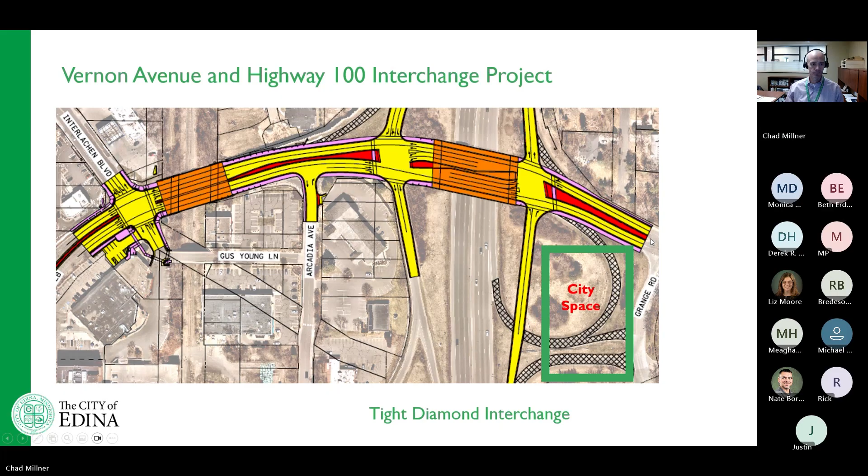We have been communicating in many methods, so thank you for receiving those and participating. Again, the best area to get future updates is bettertogetheredina.org/Vernon Highway 100. This is the last bi-weekly virtual meeting that we'll have this year, and then we'll think about next year going forward.

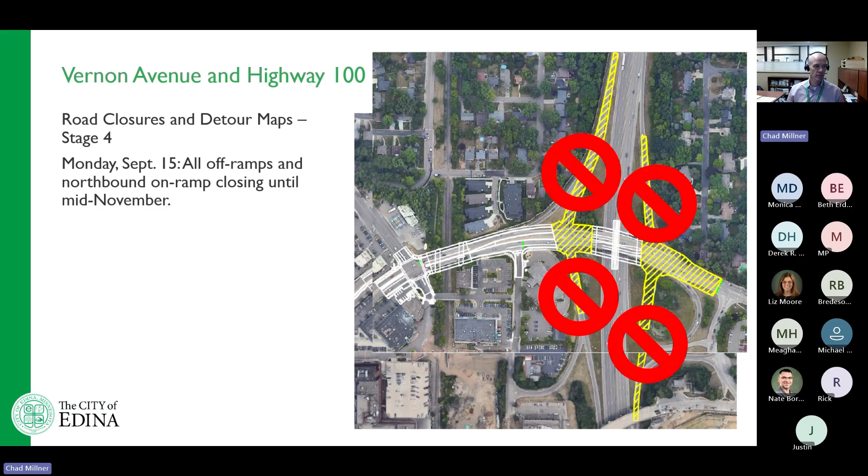What did we tell you in September, early September? We said that on stage 4, we're going to close all the off ramps, on and off ramps to Highway 100, and that we were going to close those until mid-November. We are indeed going to reopen those Saturday morning, Friday night into Saturday morning this week. So we met that promise, or at least a big portion of the project with the Highway 100 bridge and the on and off ramp.

And then what we told you two weeks ago was that there was an opportunity that this northbound on-ramp to 100 was not going to be open. It will also be opened. There is work that needs to be done with the noise wall planking. The contractor can do some of that work under traffic. There's a portion towards the end of that ramp where it gets very narrow, and they are coming up with options on how to do that work and also detail if there's going to be traffic impacts at that time.

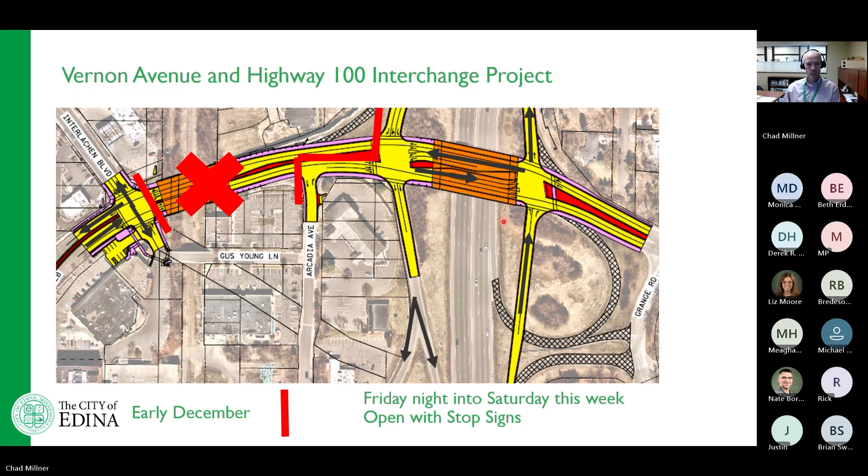Vernon Avenue Bridge, we've talked about the delays there, but work has started on that west abutment. Ames will continue to work as weather allows. Operations will stop until spring, pending weather. I already mentioned Gus Young will reopen with a temporary signal, that's the plan at this point. The new bridge is estimated to be complete in midsummer, and the cost impacts are still unknown.

After that gets enough strength, they can start backfilling up to a point where they build retaining walls on each side and the foundations for those retaining walls. We'd really like, if weather allows, to get the foundations for the retaining walls in and a portion of this backfilled before a big freeze up.

So then they could place the beams across this winter at some point. Once the beams are across, they could really start operations without load restrictions next spring to form up the forms to pour the deck. So there's a great opportunity if they can get that far with weather, it would really expedite the operations next spring, and they won't be impacted by load restrictions, or less impacted.

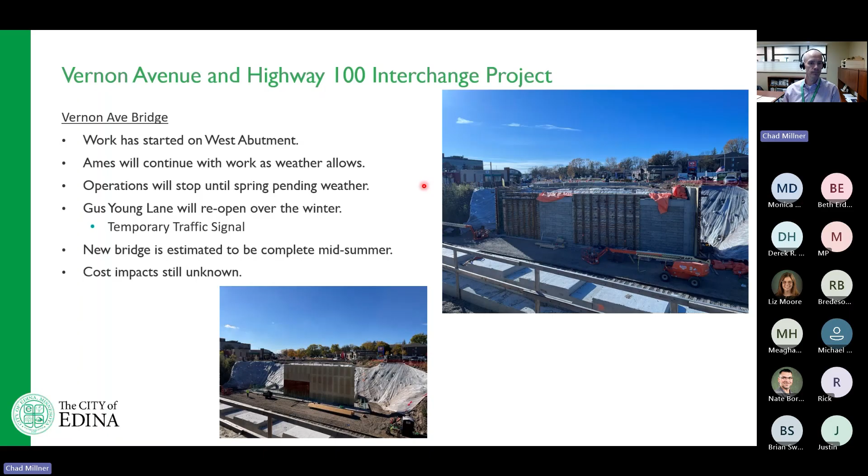What else is going on? The noise wall planks at multiple locations, still an unknown schedule. Those will start going up along Vernon and that northbound on-ramp at some point. Still don't know, the materials haven't showed up.

Ames will do site cleanup as they're doing now, especially where the road's going to reopen on Saturday. They're going to continue to work, trying to build enough to place those beams either now or over the winter to avoid those load restrictions in the spring.

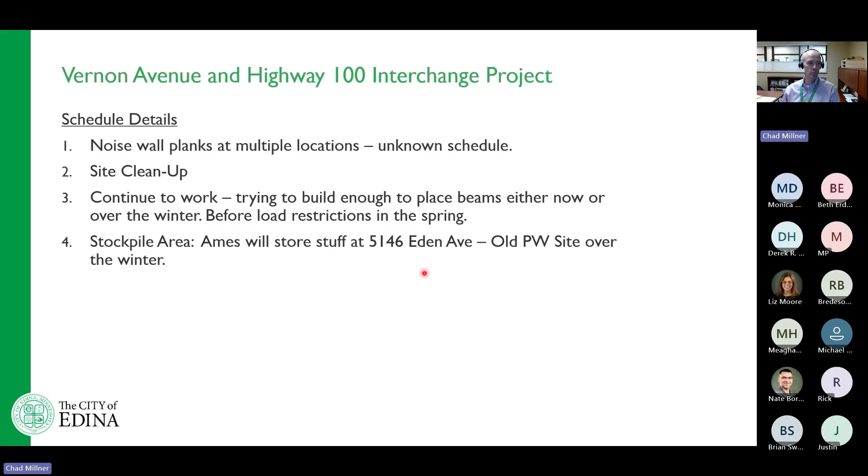And the contractor, Ames, will continue to use the old public works site, 5146 Eden Avenue, as a stockpile area over the winter. They will tidy it up, clean it up, but there will be equipment and materials stored and stockpiled there over the winter.

And then some pictures. This is a picture of Interlachen and Vernon. You can see the new crosswalk markings are there. You can see the signal pole base ready for the signal when that comes. And the final paving is complete basically through this intersection.

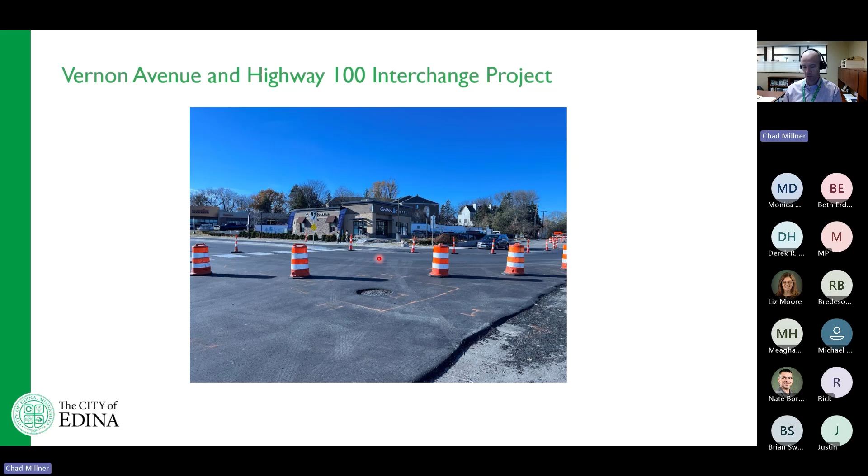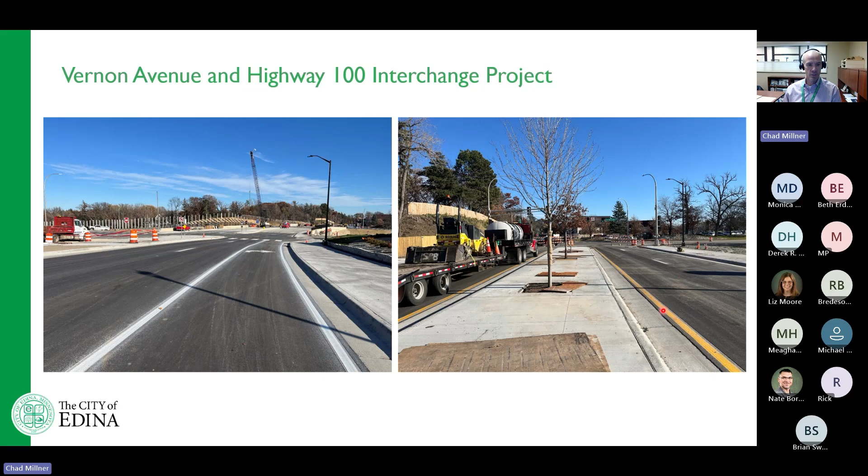Picture on the left is eastbound with the 2 new left turn lanes onto northbound Highway 100. The pavement markings, the arrows, that's done. The picture on the right is looking back down the new off-ramp alignment, so you're looking south, which would be the northbound off-ramp. You can see the lane designations, the new crosswalks.

Can't quite see the push button thing, that's not up yet. Those will be installed with the signals, new light poles. But this will be the new off-ramp that'll be open on Saturday morning.

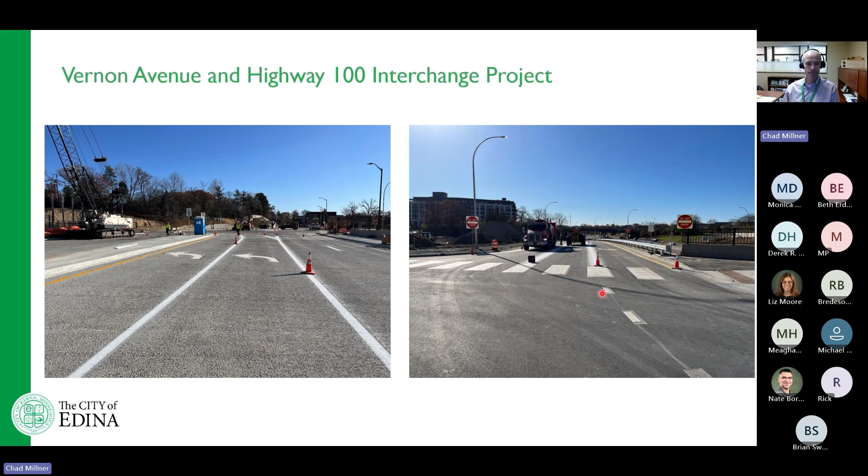Like I mentioned, the push button isn't in yet. See the medians, the turn lanes. So it's looking very similar to the renderings that were completed a long time ago.